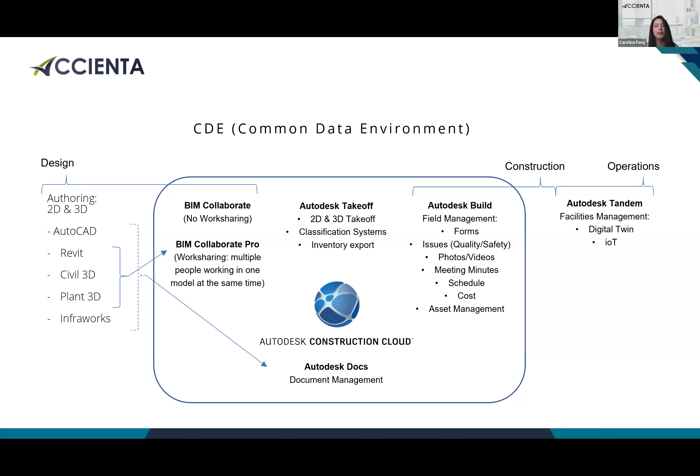Later on for construction, as I mentioned, we have Build, and for digital twin, other tools like Tandem. And last but not least, just so you know, Autodesk Construction Cloud supports not only Autodesk formats like Revit, AutoCAD, etc. There are many file formats that can be stored, viewed, and version controlled inside Autodesk Docs, which is the document management layer.

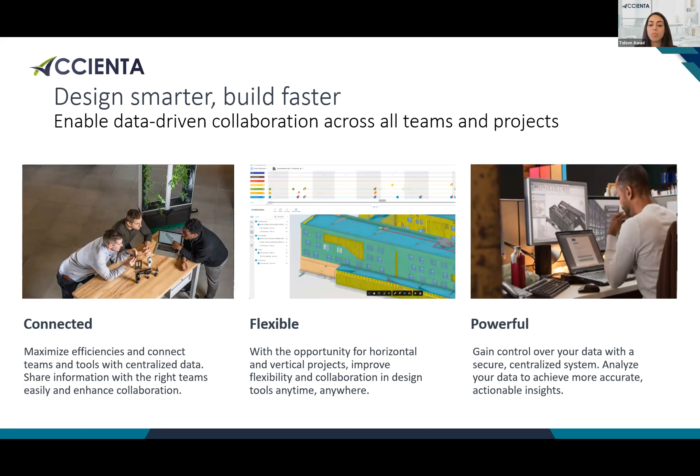Hence, with that, we are helping companies invest heavily in digitalization, and we want solutions that connect more than just teams, but also offer flexibility and powerful insights into your projects. The insights, which are the huge data that we built from our Revit models and projects, is easily accessible from one single source. So centralizing this data, so all teams are connected early on, helps the project move smoothly.

With that being said, let me walk you through the evolution of Autodesk in the Autodesk Construction Cloud. I want to highlight that we are continuously investing in all our products in our portfolio and are expanding the portfolio reach. Therefore, we build meaningful integrations between our products and our customers to carry out these end-to-end workflows from design all the way to construction operation. That is our goal. That is our vision.

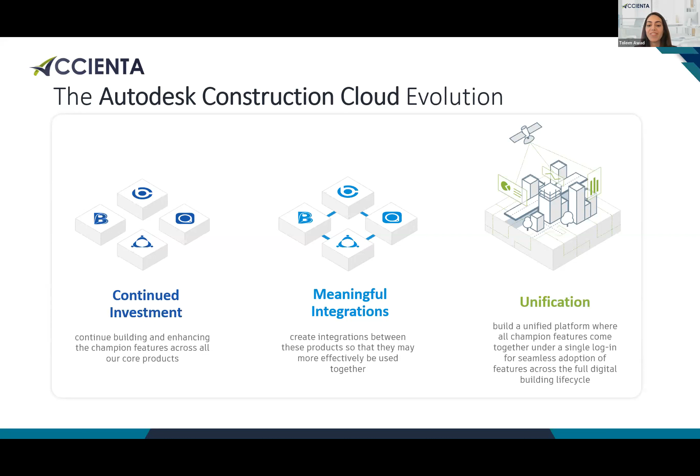And then unifying all that information to one single source, so all the data is easily accessible for all individuals and all stakeholders to leverage and have insights into the building lifecycle.

So what is BIM Collaborate Pro? Basically, it's a single platform for your teams and data projects.

It provides you with better collaboration through cloud-based software for AEC to connect and collaborate seamlessly. It also provides you with centralized data through a smarter platform for improved project data organization and management, and also greater visibility through securing access and automation capabilities to track progress and stay focused. But that's not everything, there's more than that. You can understand the latest changes to the project model in a combined view, manage design data exchange, automated clash detection, create and track issues, automatically publish updates. So I'm telling you all of that, but don't worry, everything will be more clarified in the technical overview.

With everything being said, let's know how we got to the solution of BIM Collaborate Pro. How did design collaboration evolve? What is the journey of the evolution of design collaboration?

To start with, back in the days there was only a localized central model, let's say a hard disk or whatsoever, that was distributed between the users. This was suitable for a single team with a single location, and it was firewalled as well.

This gave limited collaboration, daily BIM management, and no internal activity tracking, which got us to the server solution. This was better for companies with multiple locations. However, it didn't work with companies that work with other firms, whether offshore or otherwise. You had to buy expensive hardware and the data exchange was extremely slow.

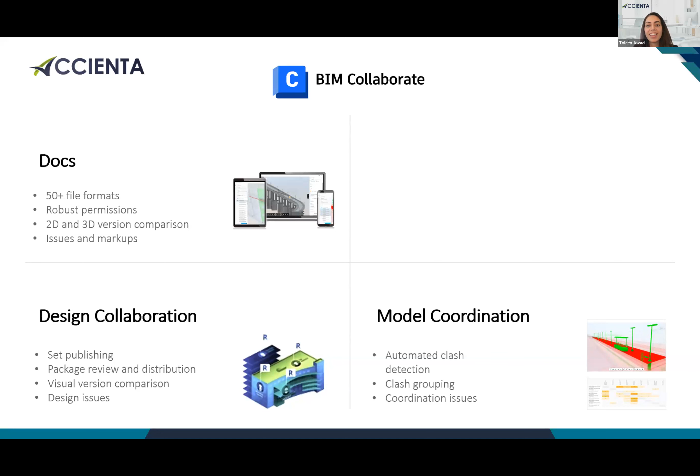These modules are listed in BIM Collaborate, and in BIM Collaborate Pro we have Revit Cloud Worksharing, which is the main difference between the two products. Revit Cloud Worksharing enables you to work anywhere, with collaboration and controlled worksharing within the cloud, allowing multiple stakeholders to work on the same model.

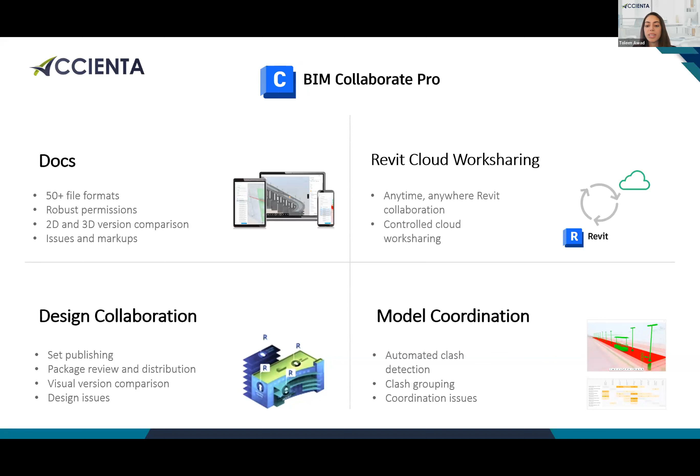So what value does Autodesk BIM Collaborate Pro offer? For the C-level, it offers reducing rework, increasing the percentage of successful projects, improving the plan-to-schedule ratio, and reducing non-recoverable costs. This is for the C-level.

How about the users themselves? Basically, they will achieve quality and accuracy. This is achieved through reducing rework, tracking versions easily, accurate model aggregation, and saving time through automated clash detection, continuous collaboration, and collaboration itself. This will reduce issues on site and help teams stay on the same page in real time with trades, managers, and designers.

So here are a few BIM Collaborate Pro metrics, based on research done by PwC. Model clashes can cost $3,500 per instance. Also according to PwC, savings from clash detection can reach up to 10% of the contract value. And lastly, according to an FMI report published in 2018, $31.3 billion in industry annual rework costs are caused by poor project data and communications.

So with everything being said, you might be a little confused. Let me walk you through the platform itself and show you how user-friendly it is and how you can access it. It's very easy, and we recommend using Google Chrome for Autodesk products.

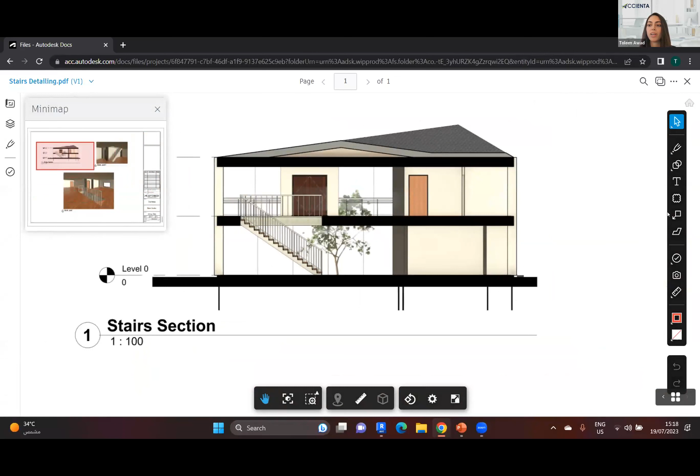And you can also add your own comments to that. So let's go here, I want to add my comment. You can just simply type in, let's say, 'fixed railing.' And you're good to go.

So now I want to link my Revit model to BIM Collaborate Pro. Let's go to Revit. As simple as it is, you can simply just upload the file and go to Collaborate. You can go to Collaborate, and just like that, you have linked your Revit model to BIM Collaborate Pro.

And then you can access it from the homepage, Autodesk Docs. You can see all of your projects from the tab here, and you can choose which folder you want to access and so on. After making any changes, just make sure you're refreshing the Revit model and publishing the latest. It's turned off because I did already publish the latest.

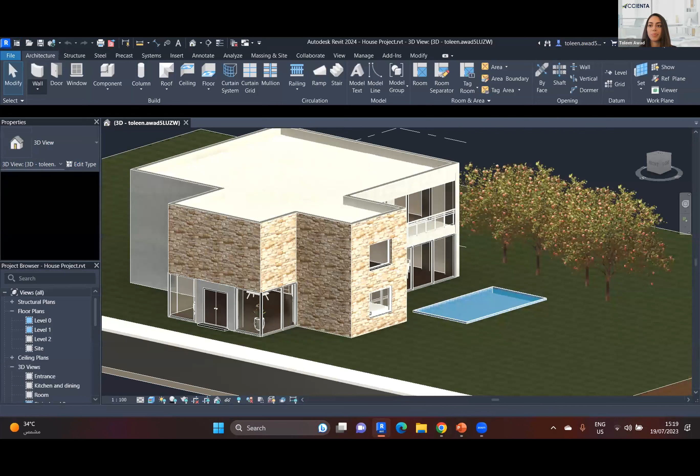Okay, back to ACC. Now, after publishing the latest, we can see here that multiple versions will be created, and all of these versions are easily accessible. We have 11 versions over here, and you can choose which version you want to make the current model. So basically, these are the pinpoints for Docs.

Now let's go to Design Collaboration. Design Collaboration is the main module of how more than one team communicates together, and how they communicate through creating packages, consuming packages, and so on. As a project administrator, I have full access to all of the teams. So now I'm going to be one of the architectural team members.

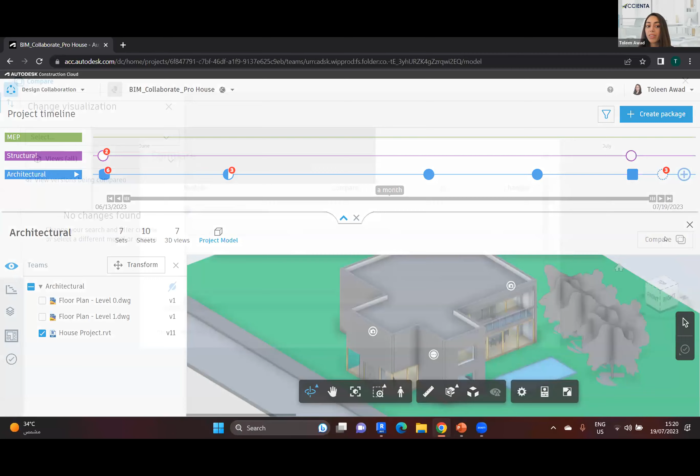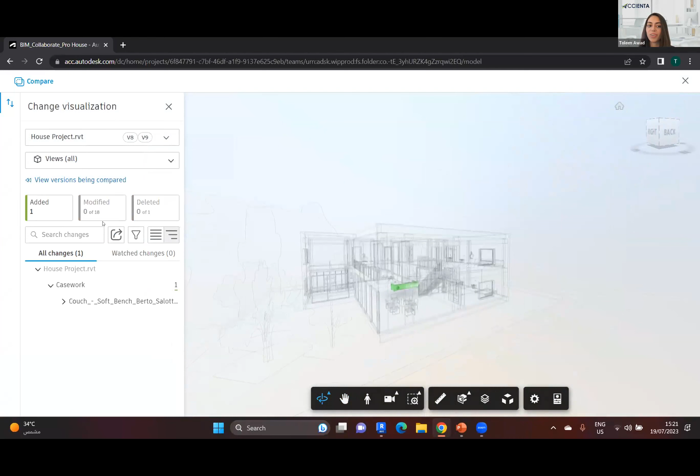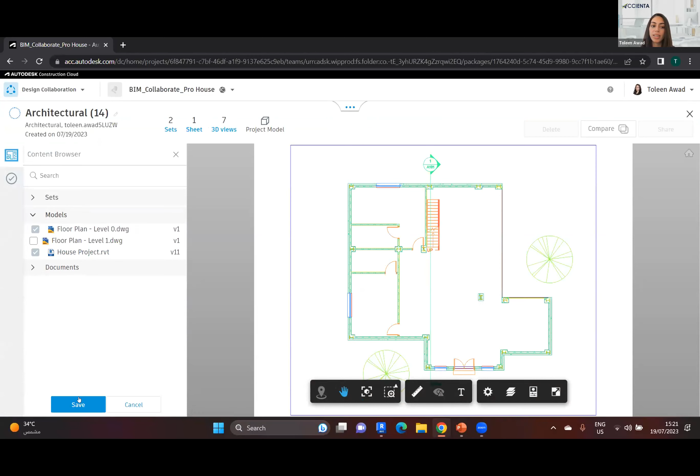Perfect. So as an architectural team member, I want to communicate with the rest of the teams by creating a package, which is very simple. You just go to create a package, and you can create sets from the Revit model itself. I'm going to choose the floor plans and the renders as well. You can choose which model you want to share with them. I want to share my Revit model and just save it. And you can share it as simple as that.

I'm going to call it, let's say, 75%. You can add whatever package description you'd like. Let's say it has the Revit model. And you can type in simply that I changed the kitchen walls or whatsoever, and just share it.

Okay, so the created package is shown on the timeline. Here we have the timeline of the project, and the packages are shown as a circle. So now I'm a structural team member, we can see a circle over here, and I want to see the changes that have been made right here. So yes, I'm seeing all of the content that is shared in the package itself, and then I can consume it. You can enter the package itself and then consume it so that all of the changes will be updated to your structural model and everything will be updated as needed.

Great. So after that, let me show you one of the most important things in ACC, which is Model Coordination. So what is Model Coordination? Model Coordination is where all of the clashes are made. So let's go to clashes. And you have this matrix over here. You can choose which models you want to coordinate between. I have all of the models chosen right here. You can create a view and you can search for the models themselves. And here we have the matrix. Now I can just simply press anything from here. I want to see the clashes between these two models.

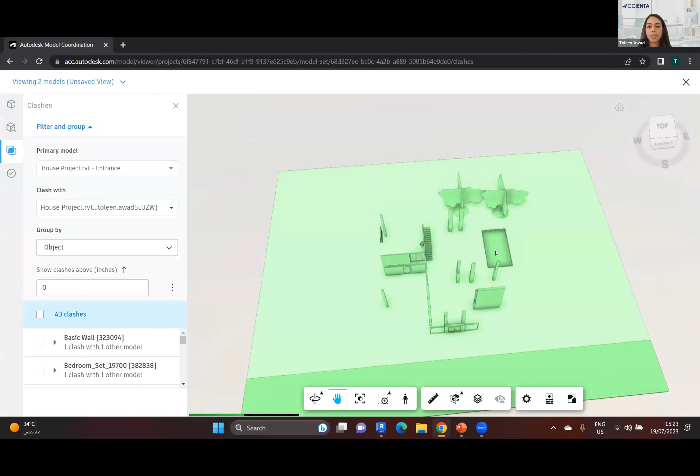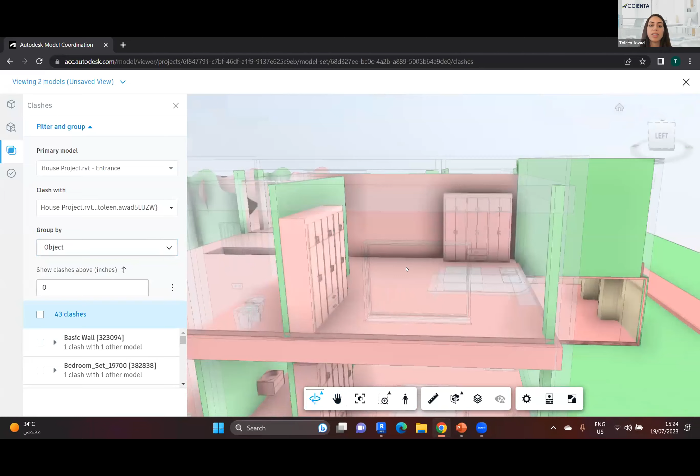My Revit model is shown right here. We can see all of the clashes and you can group them by object, by level, by location line, mass, volume, whatsoever. I'm going to keep them by object. You can surf around just to see the clashes or go and see the titles of the clashes themselves. So let's see what clash is made right here. Basically, there's a clash between the stair and the floor itself. So I can create an issue. It's creating the issue.

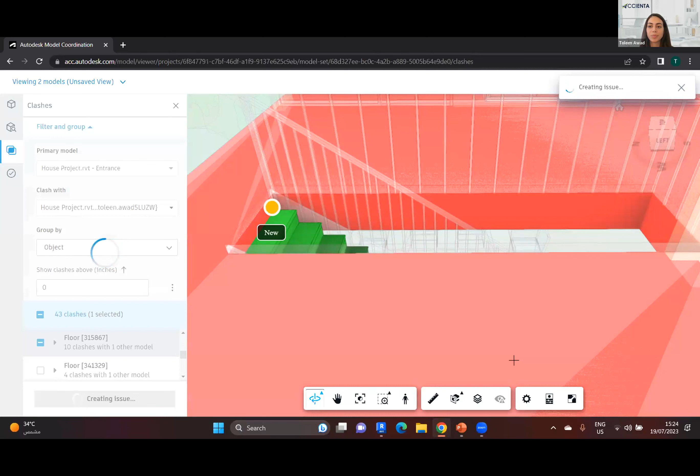And then you can type whatever title you need. Let's say, fix stair level. You can choose the status of this clash, whether it is open, pending, in review, closed, or a draft. And then the type. And lastly, the description. You can edit it or keep it as is.

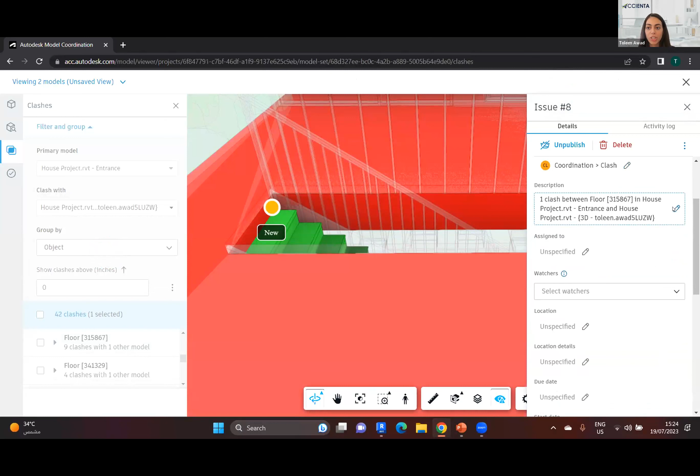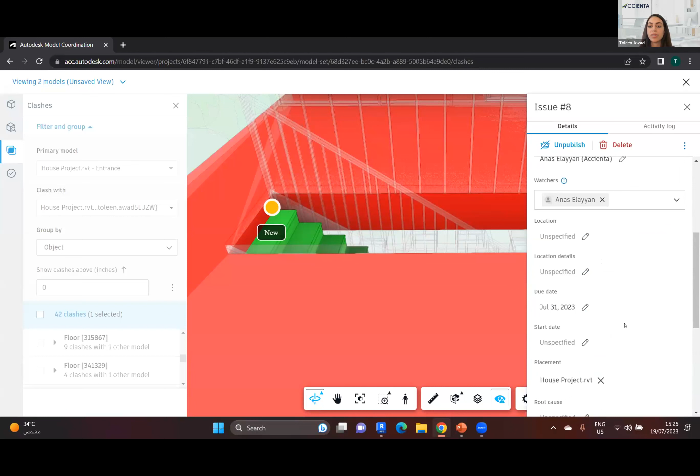After all of the information has been set, you can assign it to a specific person. So here I want to assign it to Anas. You can assign the location details, the due date. Anas, you have till the 31st of July. Great. So the issue has been created. And then you can view any other issues from the matrix that you have below.

After that is done, you can view all of your issues from the issues button right here. You can see fix stair level, and you can see which issues have been open, closed, which are still drafts, in review, pending, and so on.

Okay, so these were basically the main modules that we want to show you for today. But different modules that you can see is we have a meeting button as well, which basically you can create your own meeting. You can create a meeting just simply by pressing the button. You can choose the date, the time, the location, if you have a video conference link, the description, meeting discussion, and so on. Let me show you the meetings that we have earlier.

So material selection. You can also request a follow-up as well, which will create a meeting in the desired date that you want. And another thing you should know about, which is really interesting, is correspondence. Correspondence is still under beta, which is being in trial with Autodesk. So basically, it's just like another version of the email right in your ACC platform. So you can send emails, you can get emails from other people and so on. You could, of course, create reports as well, if you have a previous report template, or you can create a report from zero.

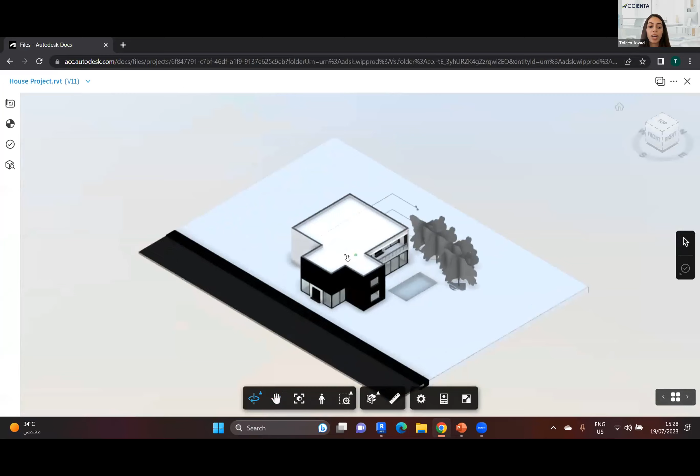Now, with that being said, this is mainly a very quick introduction to BIM Collaborate Pro. We saw how we can create the project setup, the folder structure. Everything is fully customizable, the project files, the naming, and so on. And you saw how we can add more than 50 file types as well, how we can view the Revit model, even if you were not a Revit user and you don't have that installed, you can view it also from your mobile phone, from your iPad, and so on. You can add your comments, as we said earlier, how you can add your team members. And that was it for the technical overview. So back to the presentation.

Just a quick client success story. Khansahib is a company that is based in Dubai. Basically, it reduced snagging administration by 60% with Autodesk Build, which is a huge number. Those who are working in the construction field know how hard it is for the snagging, the paperwork, and so on.